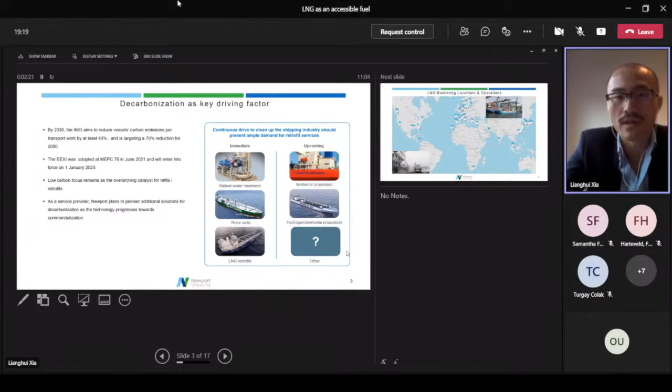So this is why we focus on the existing vessels when it comes to retrofit. We focus on LNG, and apart from the environmental performance and energy performance, one key element is that LNG is very readily available, and there's already existing infrastructure on supply being built up around the world. So it's a very convenient fuel, and also a viable fuel for the foreseeable future, especially viable for the existing fleet, which is a lot.

So how to do it? A retrofit project is smaller than a new building, but bigger than a normal repair and retrofit project. It's a multi-party project. We work with the best partners in every field, so the key thing here is that when every party is an expert in their own field, the execution, when to work together, is key.

So for ship owners to have multiple contracts with different partners and shipyard suppliers, they will have to take the consequences if there is cost overrun or delay in one of the chain, which impacts the overall project time and cost. That's why we are offering a turnkey contract to our clients, ship owners. There's only one contract between us and owners, and we will organize with our partners from beginning to end, including design, engineering, the equipment supply, and also we have our shipyard partners and on-site engineering teams to handle the project.

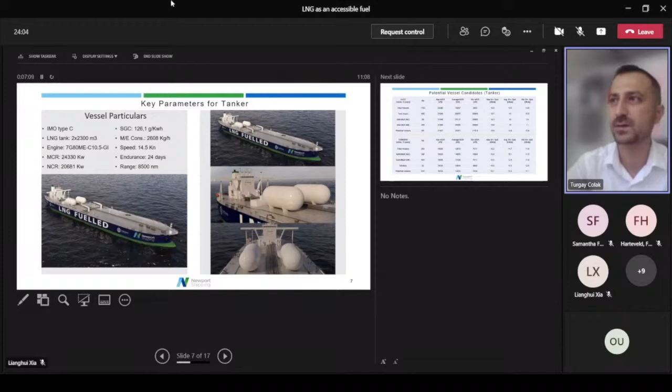So then, can we check the next slide, please? Here you can see our study outcome, considering only vessels below 10 years old. We group two parts: one is VLCC, the other is remaining tankers. Our approval in principle is based on the VLCC concept, which is ready to start. You can see the average speeds, average engine loads, and number of vessels. In total, around 400 VLCCs are potentially possible to convert to LNG, and around 600 existing tankers can be converted to LNG.

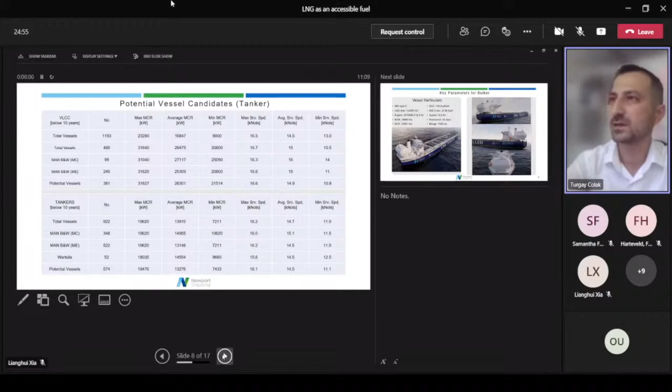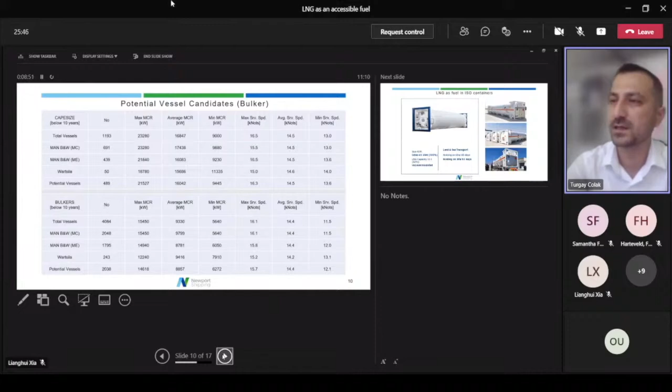Next slide, we can see again the table of existing statistical data of the existing vessels. For Cape size, more than 400 vessels are a potential for LNG, and total bulk carriers more than 2,000 need to be addressed for LNG potential. On the next slide, for container vessels, it's slightly different.

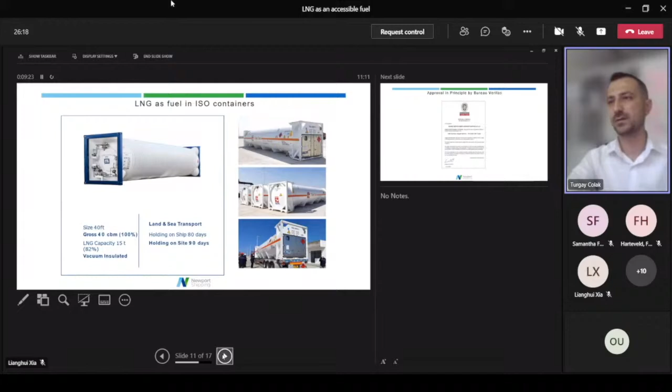We have an approach that uses LNG ISO containers on deck, which will be some kind of battery pack. These containers can be loaded and unloaded during cargo operations at port, and we got approval in principle from Bureau Veritas. On the next slide, we can see a conceptual arrangement of the containers. We use the aft deck above the mooring part of the vessel. It will be a module which can be suitably integrated into existing vessels.

It's based on 95 TEU containers, but the structure will remain the same. We can just increase or decrease the container numbers, so we can adapt easily to each container vessel. You can see how the operation can be handled during port, where truck loading happens. Trucks will bring the containers, or barges through the sea will bring the containers to the port, and then using port cranes, we can load these containers. The only remaining part is some connections that need to be done on board by crew.

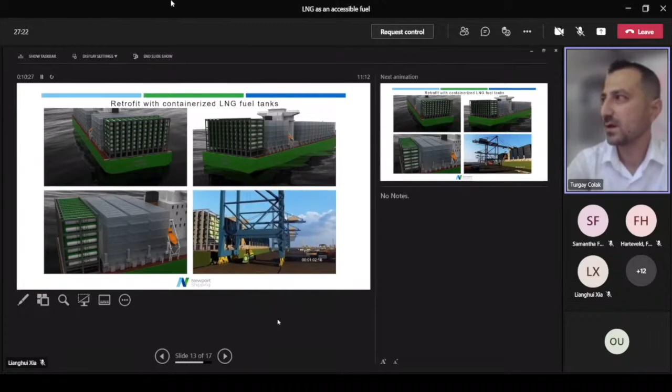On the next slide, we can see again the existing vessels for container types, and totally we got around 900 vessels that can be converted for different sizes, of course, and also more than 200 new building orders can be adaptable to our project. On the next slide, we can see our partners all around the world, and now I will hand over to Mr. Frank from WÄRTSILÄ. Thank you.

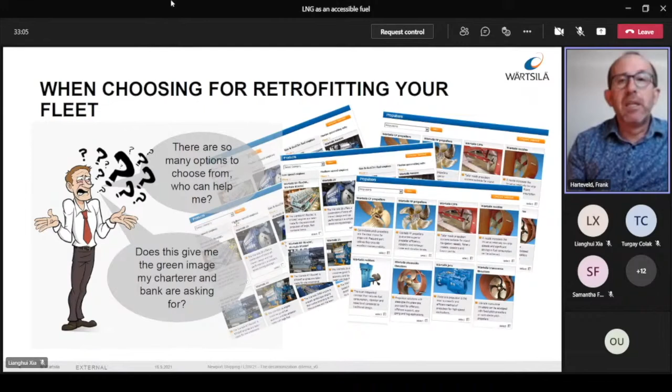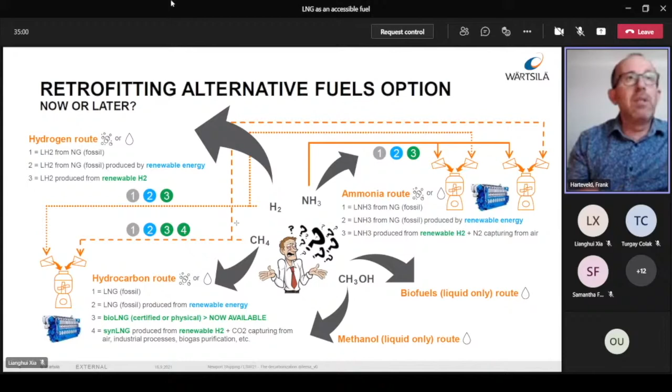The liquid routes are also possible routes where you can see that methanol nowadays is also getting more and more attention. Can you go to the next slide, please?

So if you look at the two engine types we see on board of the larger ocean-going vessels, we often see the two-stroke solutions. Looking into the time and the need to reduce our carbon emissions, we see in the blue bubbles that there are already quite many different programs where we are able to reduce the carbon footprint generated by the combustion engine.

Further into the route, we will start informing you within the next periods that we will come up with retrofitting possibilities for two-stroke engines, to LNG, to methanol, and even if you're considering in a later phase to convert from LNG to methanol or from LNG to ammonia, we will be able to offer such solutions.

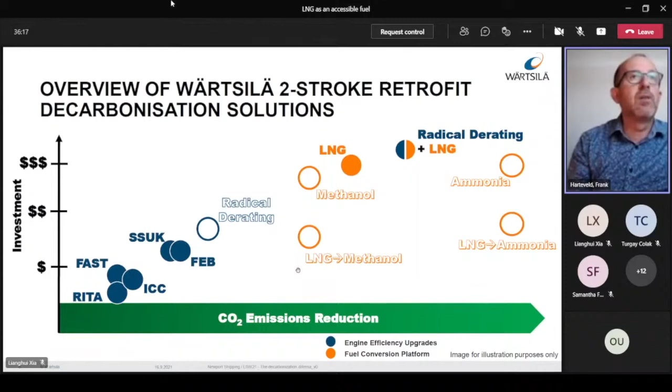Next slide, please. About the four-stroke engine, Wärtsilä has the widest experience on the dual fuel engine combustion technology. We have a large track record with more than 40 million on the counter.

It's a very flexible platform, meaning the dual fuel engine is not a difficult eater, but what's important with all these upcoming new fuels is to have full understanding of what you're feeding the engine - you need to understand the calorific value of the energy you're feeding it. Secondly, if you're talking about fuel blends, which we will see showing up in this transition period, it becomes more difficult to understand the composition of the fuel, and also the energetic value of the fuel.

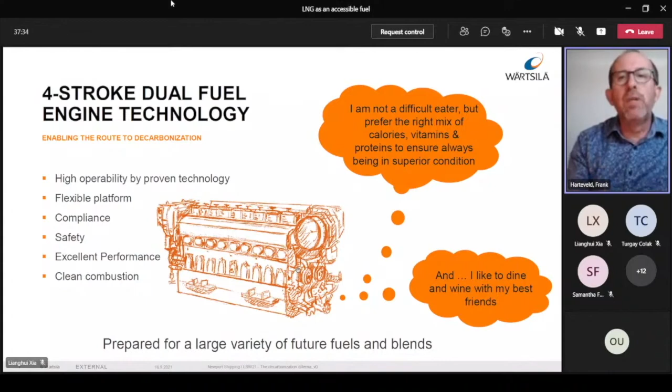So our preference is moving us in a direction - next slide, please - to understand an optimum performance of the vessel, to lean more from a product-oriented delivery to an integrated solution delivery.

That means we can offer you a complete solution in combination with Newport Shipping, which focuses in principle on the retrofitting itself. As a continuation, we can offer you life cycle agreements for the rest of the lifetime of the vessel.

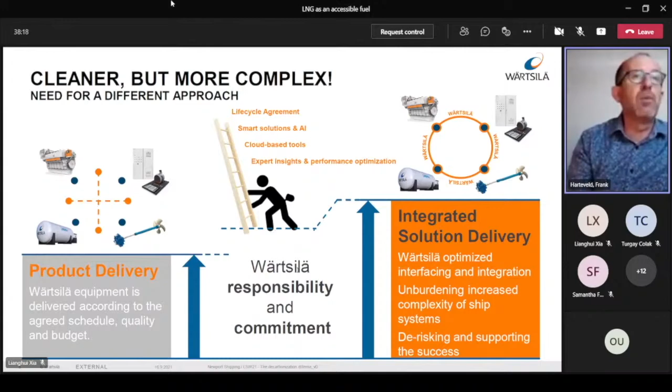Next slide, please. The biggest challenge, as I already mentioned, is non-compliance. This is the fear of many ship owners. And there are a couple of tools.

I would like to - next slide, please - put two choices on the screen here. If you're questioning yourself on how to continue with and keep your existing fleet compliant, there are two possibilities: either you do nothing, or you consider making a capex investment.